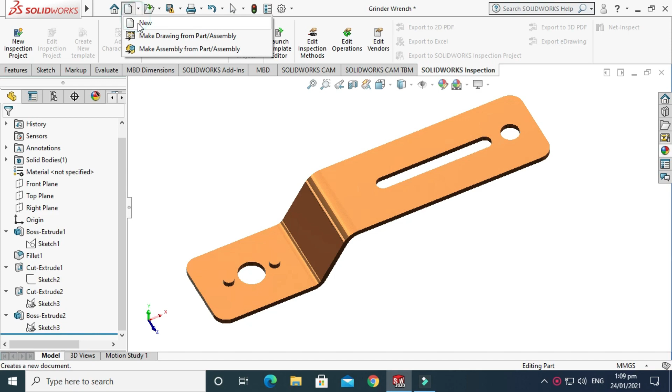First, go to New and select Part and press OK. Now we are in the SolidWorks interface, so go to the Sketch tab. First I'll select my background to plain white and check my units, which are mmgs. Go to the front plane and we'll do a basic sketch here.

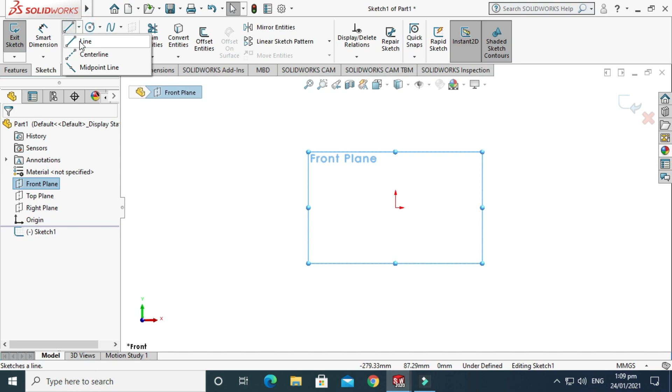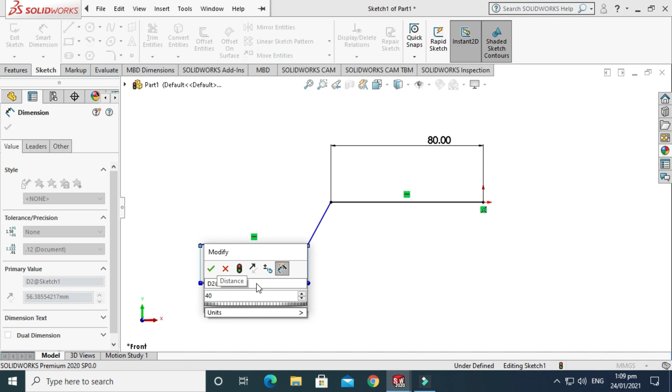I'll draw 3 lines. The first line is 80 millimeters, and this line is half, 40 millimeters, and the angle is 60 degrees. The vertical height of this diagonal line is, let's say, 20 millimeters.

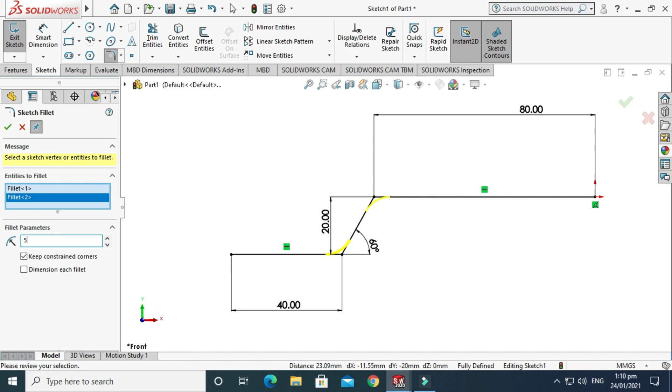Now I'll do some fillet of 5 millimeters. Just change it to 5 and click OK. We'll do some offset of 2 millimeters, make it reverse, and select end caps to lines, then press OK.

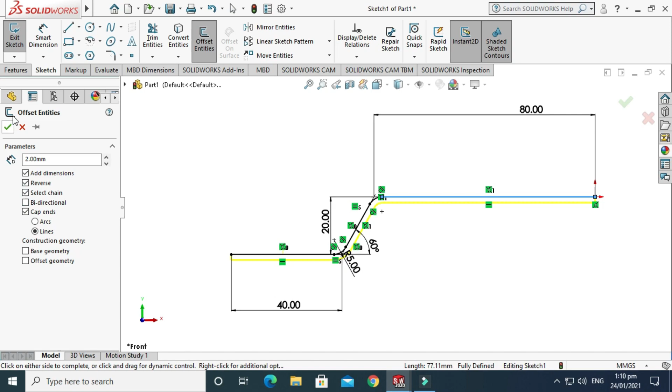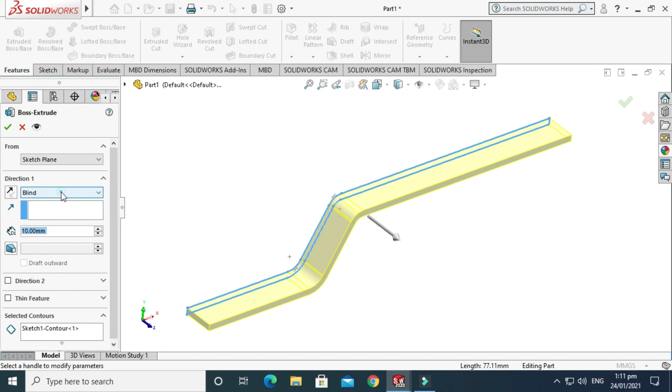So we are done with the basic contour of this geometry. Click exit, go to Features tab, select extrude boss, select the sketch, and instead of blind, click mid plane. I'll extrude it from mid plane to 30 millimeters. Now we are done with the basic extrusion.

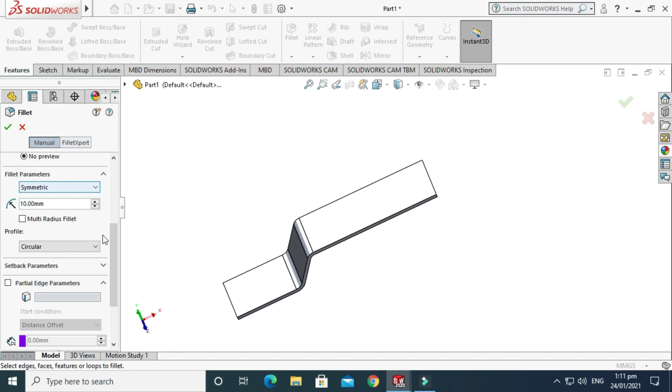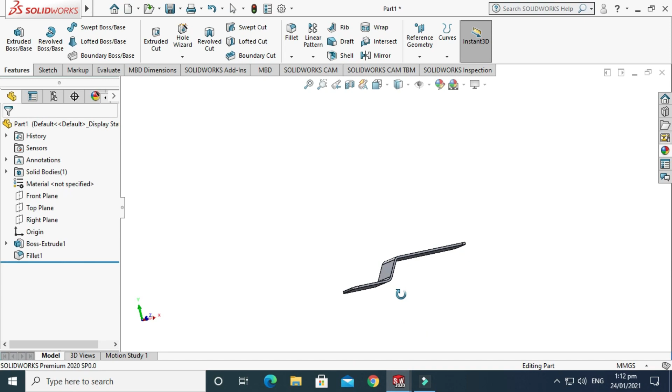We'll do some fillets of, let's say, 5 millimeters on the corners of this wrench. Just change it to 5 millimeters and select the corners of this wrench, rotating it so we can easily do all this.

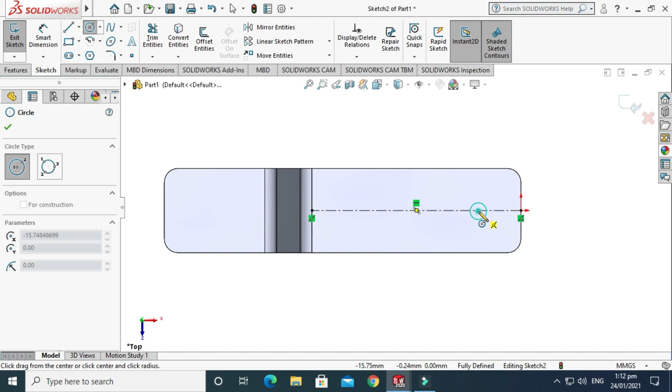We are done with the fillets as well, and now I'll draw some sketch on the top plane or top surface of this wrench. Just make it a construction line, and I'll draw a circle and a slot. The circle is 7 millimeters in diameter, and this dimension is 10 millimeters.

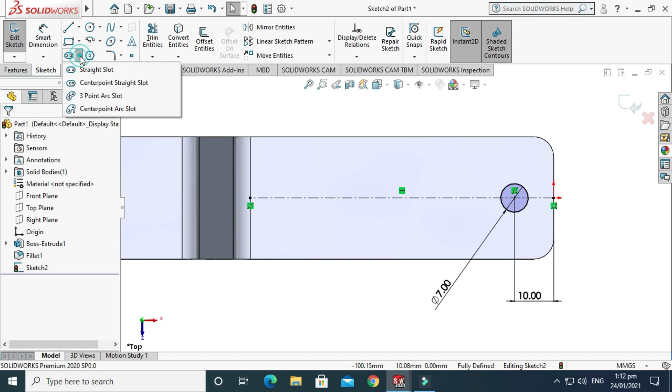We'll sketch a slot as well. The slot is 40 millimeters. Let's make it a slot and give it a dimension of 40 millimeters. Press OK and we'll drag it.

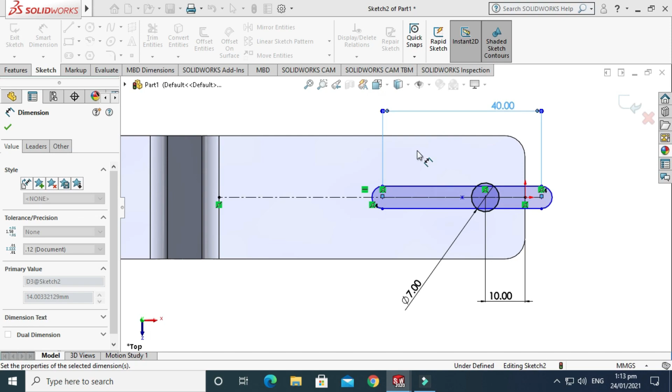The dimension is 5 millimeters, the thickness of this slot, and this dimension is 10 millimeters as well. So we are done with this sketch.

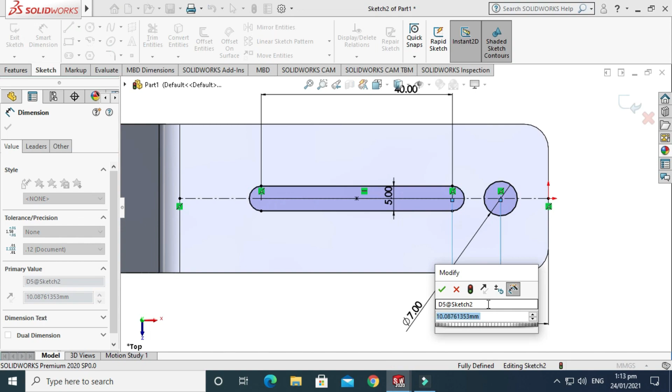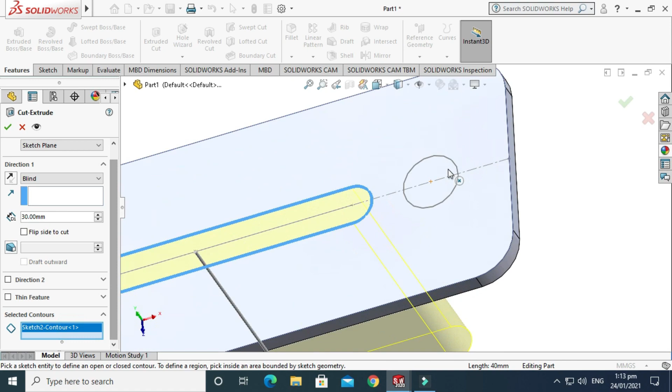Just exit, and we'll go to the Extrude Cut command and make a through-all, negative extrusion. Go to Contour and select the circle, then go to Through All. Click OK and we are done with this extrusion command.

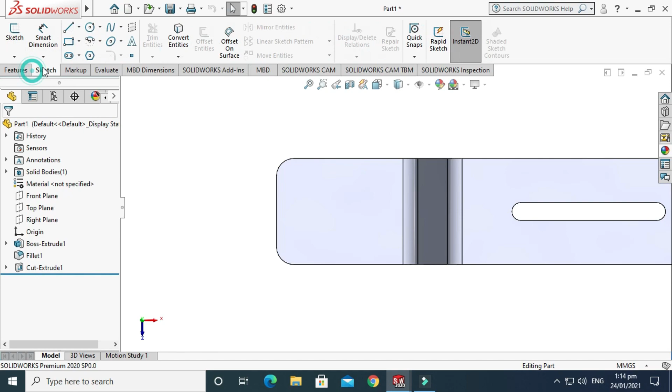I have to do another sketch on this plane. Just make it normal, and we'll do another sketch. We'll sketch 3 circles: a big circle of 10 millimeters and two small, equal circles of 4 millimeters.

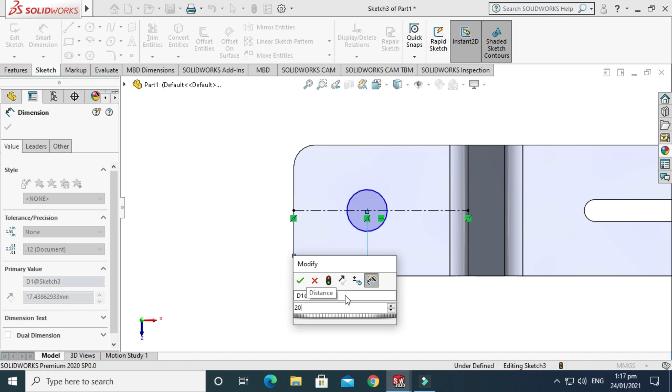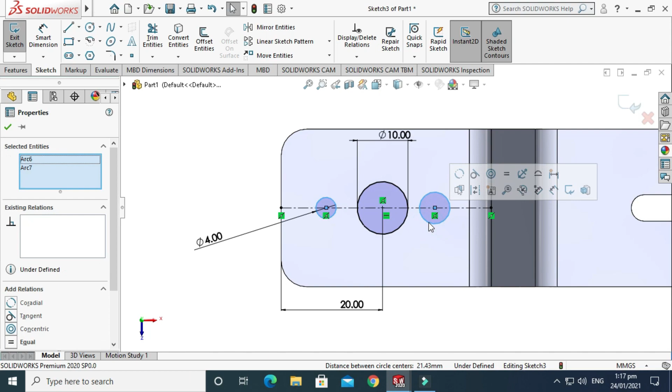Make a big circle, this dimension is 20 millimeters, and the dimension of the big circle is 10 millimeters. We'll draw two circles of 4 millimeters, and these circles are equal, so we'll make a relation of equal. This dimension is 9 millimeters.

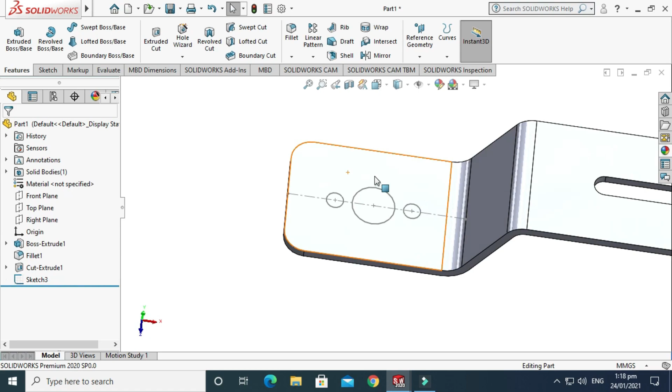We can make it by mirror entities as well. Now I have to make an extrude cut of the big circle and extrude boss of the small circles. Go to Extrude Cut, and we'll make a through-all extrusion here. Using the previous sketch, we'll make two positive extrusions of 2 millimeters.

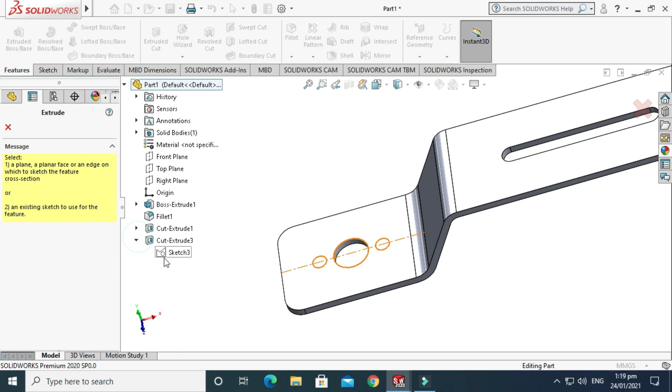Go to Contour, cancel the selection, and we'll select it manually, making a 2 millimeter extrusion. Press OK, and we are done with this grinder wrench.

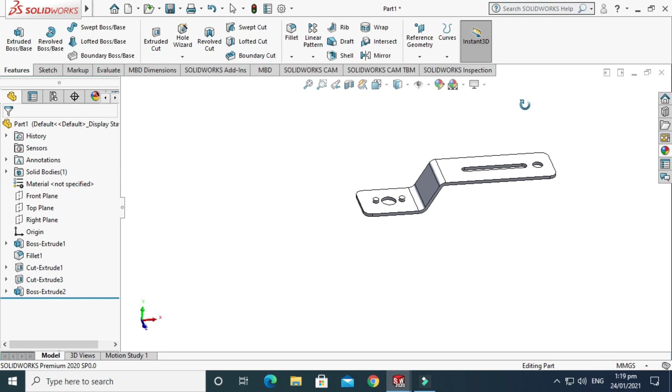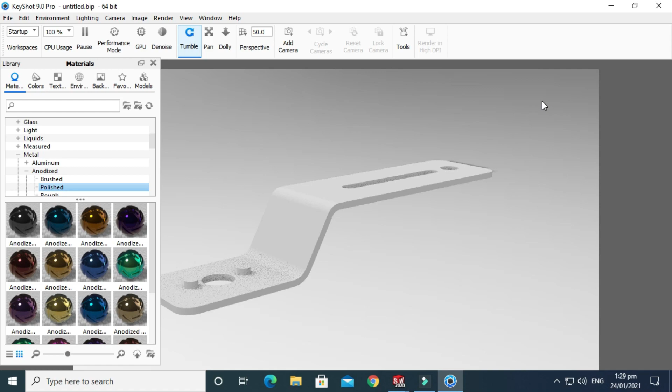Just rotating our model. Next we'll go to Keyshot and do some basic rendering. I'll use the Keyshot plugin. Keyshot will take some time depending on the PC or machine you are using.

Go to Environment, and I'll turn off the shadows. I need a plain white background, so go to Environment and select color. Now I'll use the tree option, and apply some anodized material, polished.

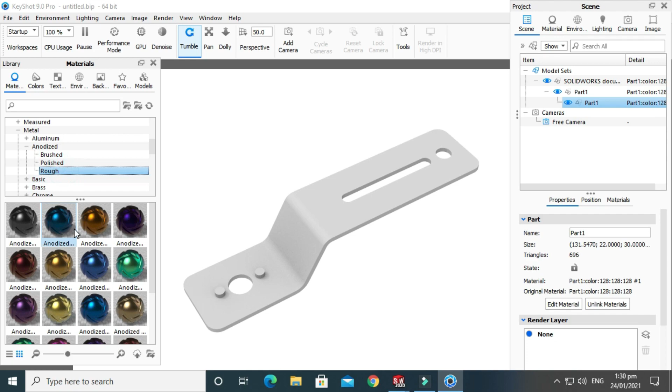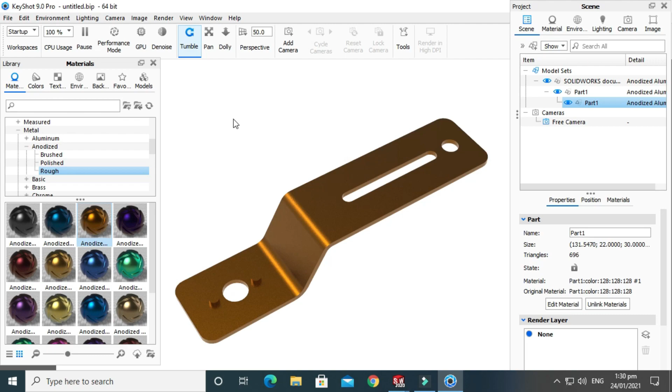I think rough will work for me. I think the first one is quite fine for this grinder wrench. I need a picture of 1280 by 720. Just rotating my model, and I think it should work.

I'll choose a brass color, and I won't use any texture or environment. Just go to Render and do some basic settings. I need 256 samples, so it will be a time-taking rendering process, and I'll need 1280 by 720, so I'll change it.

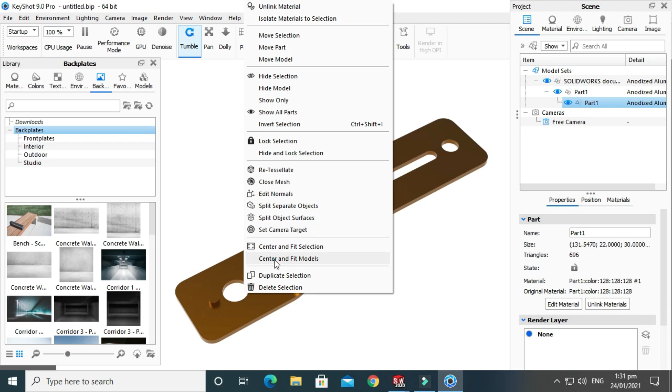Using the pan command to make it more real, and rotating my model for the final render. I think we are almost done. I'll choose 100 perspective, and we are almost done with these settings.